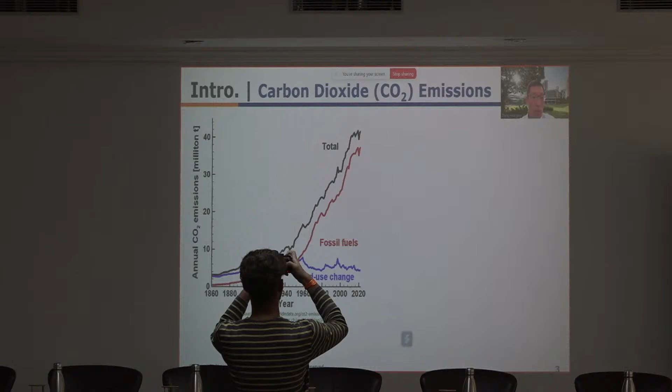Here you can see the increase of CO2 emissions since the last century. We can see that CO2 emissions mainly come from fossil fuel combustion. In terms of greenhouse gas emissions, CO2 accounts for around 65%. So basically, CO2 stands out as an important greenhouse gas, which drives global warming.

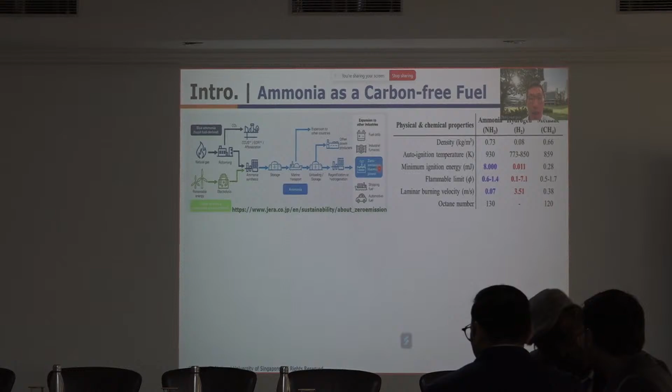Ammonia as a fuel is widely studied in recent years. Basically, we have blue ammonia if it is derived from fossil fuel. We can also have green ammonia, which is more promising if it is from renewable energy. For the downstream application, it can be used like fuel cell, industry furnace, and also power plants, and marine fuel, and for automotive fuel.

So it has some advantages. First of all, it is carbon free, so there is no greenhouse emission after it is burned. We also have the possibility to have the green or blue synthesis if it is from solar or electricity, and it also has a superior energy density. We can also leverage the existing infrastructure for a lower economic cost.

However, it also has some challenges. The first one is a very high minimal ignition energy, so it is very difficult to ignite and easy to quench. Here you can see we calculate the different fuels: ammonia, hydrogen, and methane. The minimum ignition energy for ammonia is around 8 millijoules. However, for hydrogen, it is much lower.

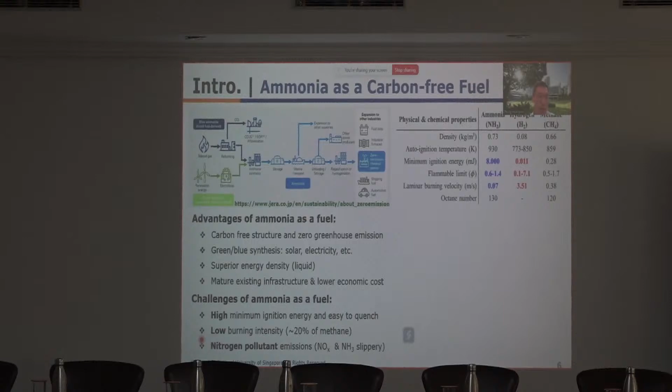The second point is a low burning intensity. Ammonia is around 0.07 meters per second, and for hydrogen it is 3.5 meters per second. The last one is about emissions. We have nitrogen pollutant emissions from ammonia combustion, so we need to develop a scrubbing system if you'd like to use ammonia in the engine.

There are different ways to enhance ammonia combustion. One of them is fuel blends. If we blend ammonia with hydrogen, it can significantly enhance the reactivity. Here we can look at the minimum ignition energy as a function of the equivalence ratio: this one is pure ammonia, then we have some hydrogen blend, this is 10% hydrogen blend increased to 70%, and this is pure hydrogen. We can see the minimum ignition energy is reduced significantly as long as we have hydrogen addition in the fuel mixture.

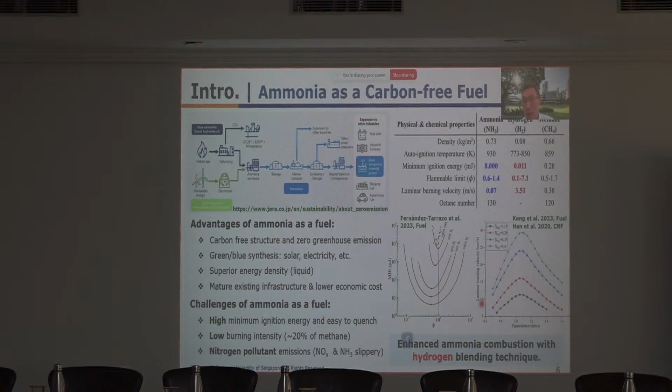Basically the same for the laminar burning velocity. We can see if we increase the hydrogen fraction, the laminar burning velocity increases very quickly.

For hydrogen and ammonia combustion, this table summarizes the different experimental results, focusing on speciation, ignition delay, and laminar burning velocity. You can see these are measured from different facilities, including shock tube, flow reactor, jet stirred reactor, and constant volume vessel. The conditions are also listed here, including temperature, pressure, equivalence ratio, and so on.

So what are the conditions for the internal combustion engine? This shows pressure versus temperature. For internal combustion engine, it is around here, corresponding to relatively high pressure and intermediate temperature. If we look at this data again, we find that relatively limited data corresponds to the engine conditions. The pressure I highlighted here is relatively high, but for the rest it is much lower than the engine conditions.

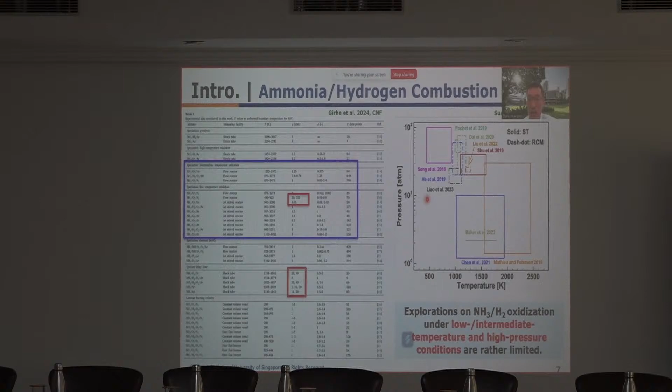This figure further visualizes the operating conditions in this test. So basically you can see that studies on ammonia hydrogen combustion at low, intermediate temperature and high pressure conditions are still very limited.

So we would like to say that this low temperature hydrogen-ammonia blend combustion at elevated pressure is caused by low temperature chemistry. When we say low temperature chemistry, it has been extensively studied for hydrocarbon fuels.

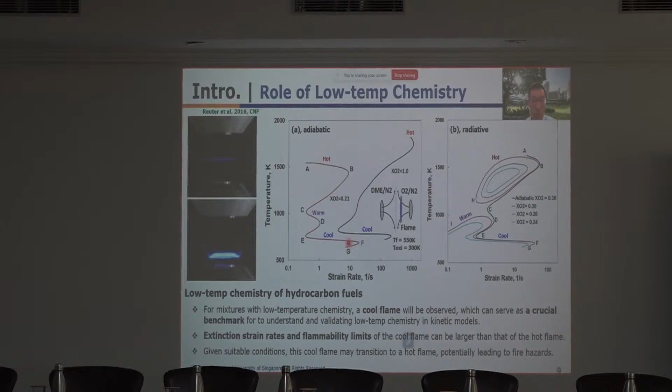This is temperature versus strain rate, under adiabatic conditions, and this radiation is considered. So basically we can observe the hot flame, the warm flame, and also the cool flame. The extinction strain rate and flammability limits of the cool flame can be larger than the hot flame—this is the extinction limit of the cool flame, and this is the extinction limit of the hot flame.

So basically you can see the cool flame extending the strain rate here. And given some suitable conditions, this cool flame may also affect the flame dynamics.

For the flammability limits, you can see here—when we change the O2 mole fraction, the flame curve becomes smaller and smaller. Once this curve degrades to one point, this hot flame becomes nonflammable. However, for the cool flame, we can still observe flame solutions. So basically, the cool flame may extend the flame limit.

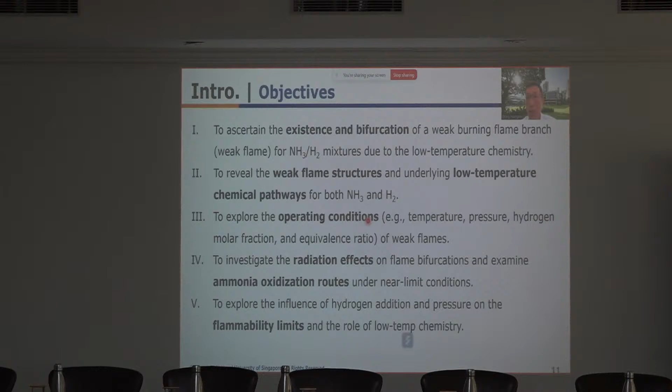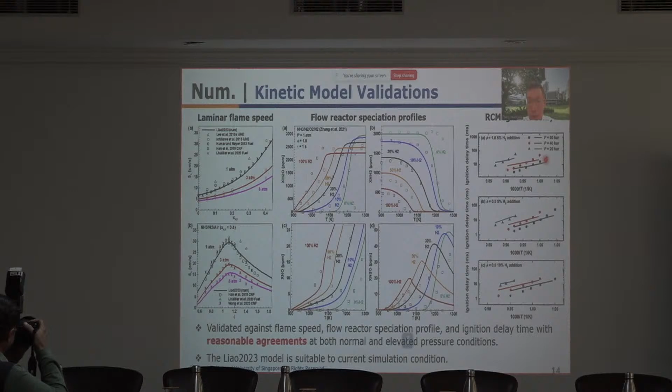So the last one is the RCM data, where we compare the ignition delay time for different pressures. So this mechanism is suitable for the current operating conditions in this work, in terms of the laminar burning velocity and also the speciation profiles.

So then in the results and discussion part, I will first show you the adiabatic hydrogen, ammonia hydrogen counterflow flame. This part of the work has been published in Combustion and Flame. So this is the results: this is the maximum temperature, and this is the strain rate. Here we show the flame solutions with different temperatures.

From 300 Kelvin to 700 Kelvin. So the equivalence ratio highlighted in yellow corresponds to the normal hot flame. This flame has a high temperature and also high heat release rate.

Okay, and so for all these cases, we can observe the cool flame, regardless of the choice of temperature. So we can compare the flame structure for the hot flame and cool flame.

So we choose the 500 Kelvin case, this black curve, and if we look at it, the weak flame corresponds to the dashed line, and the hot flame is the solid line. Basically, we can see the heat release rate of the weak flame is much lower than the hot flame.

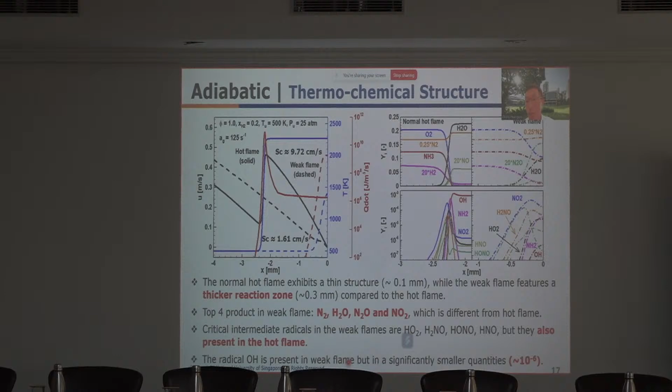They are also present in the hot flame, such as HO2, H2NO, HONO, HNO. And for the OH radical, it is present in the weak flame, but the quantity is very small, as you can see from here.

60, and the deactivated reactions are R0, R4, and R61. So as you can see from here, this is the heat release rate for the normal hot flame and also the weak flame.

So for the hot flame, reaction 160 contributes a lot to the heat release, and then the next one is 61. So 61 and 160 are ammonia reactions with the OH radical, and here it is amino radical reacting with OH, for heat absorption. These two are endothermic reactions.

So this corresponds to R0, where H reacts with O2 to give O and OH, and the other one is R4, where OH plus OH gives H2O and O.

So this is for the hot flame, and for the weak flame it is still reaction 160, where ammonia reacts with OH to give H2O and NH2.

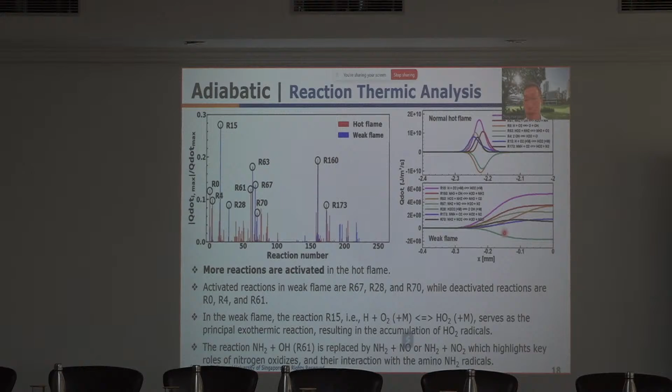So here we further look at the reaction paths. This red one is where we start from. For the hot flame, we can see ammonia and NH2, and then we have two paths, with different routes towards hydrogen and towards nitrogen. So NH, and NO directly to NH, and there are also some reactions involved in the weak flame generating N2O.

So here we calculated the reaction path, normalized by the reaction flux of this reaction. So we show that the circle means we have two stable branches, including the hot flame and non-hot flame.

In this case, we can further calculate the two extinction strain rates under the limited... if we further increase the hydrogen, the existing range of operating conditions of the weak flame, for different hydrogen mole fractions and equivalence ratios.

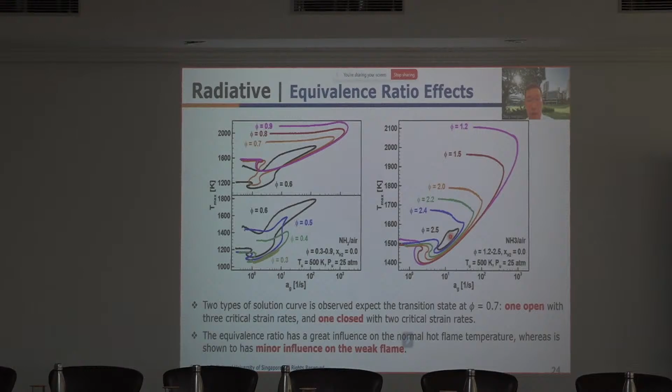This is for the lean case, and for the rich case we observe the same behavior. So if we increase phi to a relatively high value, say 2.5, the curve becomes closed. If we further increase it, we will reach the flammability limit position, and we also have the extinction limit, which indicates the jump limit for the weak flame between the lower and upper flammability limits.

So we are interested in the near... one interesting phenomenon I would like to highlight here is the case of phi equals 3.4. As you can see here, we will have two closed circles: this one corresponds to a hot flame, and this one corresponds to a weak flame.

So for this case, the strain rate actually to sustain the hot flame is already very limited, indicating it is very close to the flammability limit. However, for the weak flame, the strain rate is still much larger than this case. This means the existence of the weak flame can extend the flammability of the ammonia and hydrogen mixtures.

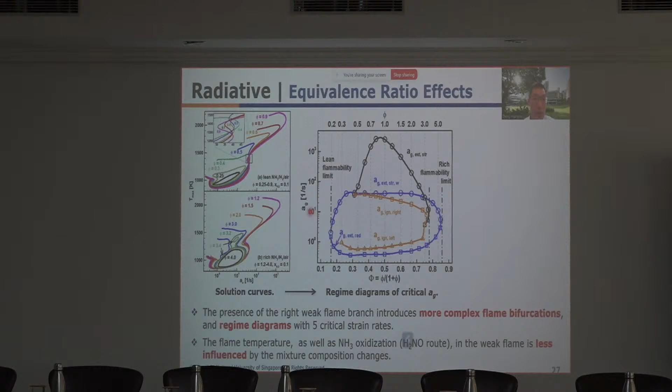We also show here the limit strain rates, including the AGEXT-STR, and also the blue curve. The blue curve is the AGSTR stretch for the weak flame, and the extinction limit, and this is another extinction limit for the right branch.

Here are the chemistry results. We did a similar analysis as shown in the previous slides, and the conclusions are similar. The H2NO is dominant, and then other important reactions include the N2HX reactions.

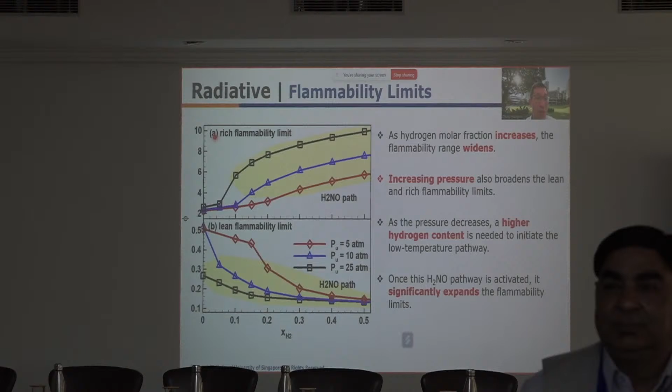This figure is relatively important for the second part of the work. This is the equivalence ratio, and this is the hydrogen mole fraction. We show the rich flammability limit in figure A and the lean flammability limit in figure B. Looking at the black curve, the region in between is the flammable range in terms of the equivalence ratio.

What we see is that when the hydrogen mole fraction increases, the flammability range widens. If we increase the pressure, such as from 5 atm to 10 atm to 25 atm, this increased pressure also broadens the lean and rich flammability limits. As the pressure decreases, higher hydrogen content is needed to initiate the low temperature chemistry.

We highlighted the range showing the importance of the low temperature chemistry, mainly H2NO path. You can see for both the rich side and the lean side, H2NO path is important in both situations. Once this H2NO path is activated, it significantly expands the flammability limit.

If we look at this black curve, starting from this point the H2NO path becomes important, and the range of flammable conditions is extended compared to this condition and this condition.

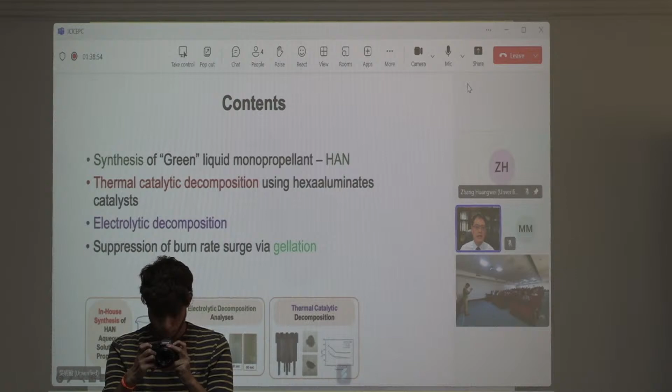For hexaaluminates, as I mentioned, it is a group of high-temperature catalysts, and we believe it is able to address the challenge of HAN's higher reaction temperature.

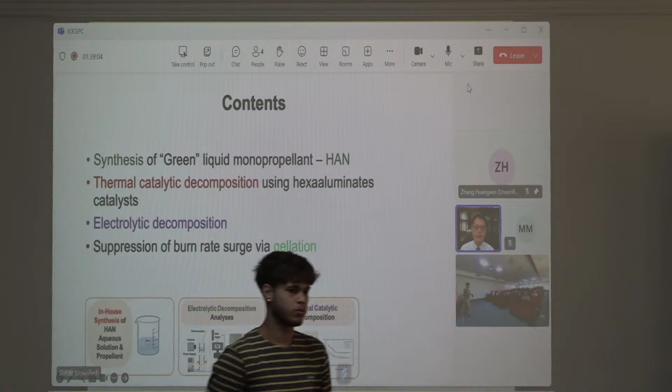The electrolytic method, on the other hand, simplifies things by removing the need for a catalyst bed in the thruster. Another challenge with HAN-based propellant is the burn rate spike caused by water boiling within the propellant.

We have tackled this by gelling the propellant with fumed silica. Building on this, we are now developing propulsion systems. There's some ongoing work there. So this is basically what I would like to discuss today in this talk.

First, as we consider the rise of space exploration in the past 10-20 years, apparently space propulsion has a growing role in scientific and commercial applications.

The need for sustainable, safer propellant has become even more apparent. Traditionally, space missions have relied heavily on chemical propellants such as hydrazine, which is known for its high performance and reliability.

However, hydrazine also has significant drawbacks, such as high toxicity and volatility, which make it dangerous to handle and store.

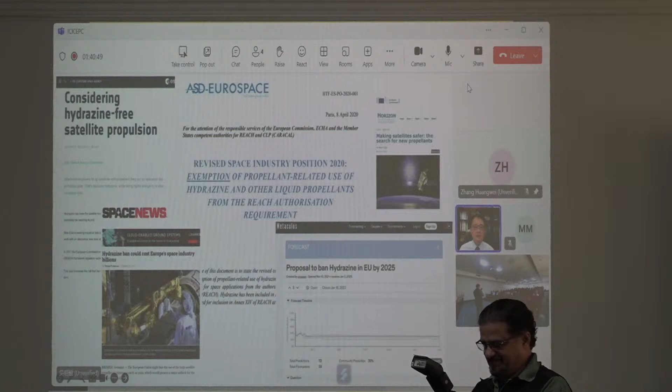Since the early 2000s, there have been discussions about banning hydrazine due to its toxicity and environmental impact, in order to mitigate the risk of handling exposure.

But as you may know, hydrazine remains widely used in space propulsion today because no alternative has fully matched its reliability and performance.

Potential substitutes, including hydrogen peroxide, ammonium dinitramide, and hydroxylammonium nitrate, show promise but require further development.

More research is essential to advance this new generation of propellants, to find safer, effective replacements for hydrazine that meet the demands of the space industry today.

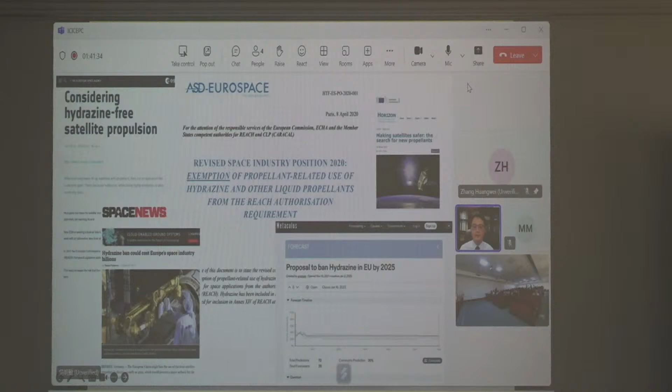Green propellants are designed to offer reduced toxicity and a safer handling profile while maintaining comparable propulsion performance.

Material toxicity is often measured by what we call LD50, which refers to the amount of substance that, when administered to a mouse, causes a 50% fatality rate.

Even skin contact with hydrazine can be deadly, with an LD50 of just 91 milligrams per kilogram.

In comparison, green propellants like HAN-based SHP163 and AFM315E have overall LD50 values above 500 milligrams per kilogram. And the other type of green propellant, hydrogen peroxide, has an even higher LD50.

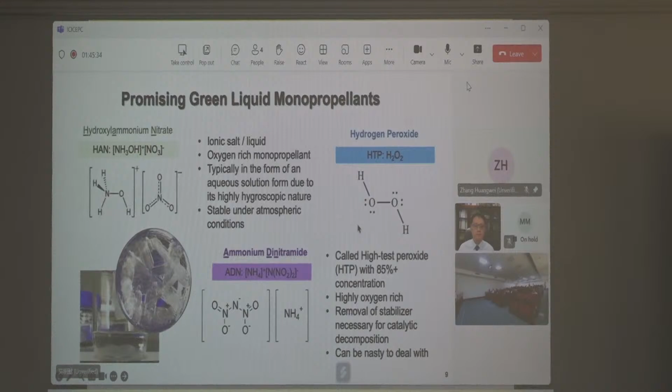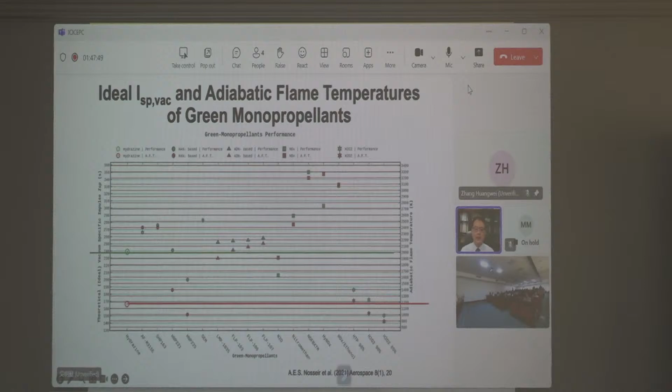For example, HAN's specific impulse can reach around 257 seconds in vacuum, which is competitive with hydrazine. However, what really sets HAN apart is its density, around 1.83 grams per cubic centimeter, significantly higher than hydrazine. This higher density allows more propellant to be stored in a limited space, which is especially valuable in compact systems.

The advantages and superior performance of HAN-based monopropellants have been proven in orbit through two demonstration missions: NASA's Green Propellant Infusion Mission, or GPIM, and Japan's Green Propellant Reaction Control System on the RAPIS-1 satellite. The GPIM test showcased HAN's potential with a 50% improvement in fuel efficiency compared to hydrazine. Together, these missions highlight not only HAN's performance benefits, but also its reliability and suitability for long-duration space missions.

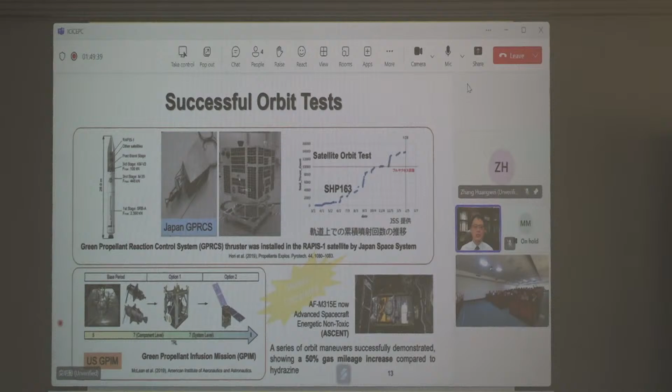With the encouraging results of HAN-based propellants, there are also discussions on using HAN for a lunar mission to propel a 6U satellite that will investigate the moon's poles for water ice.

Another exciting application of HAN-based propellants involves multi-mode propulsion, where a single propellant can serve different roles in the same mission. There are different approaches to this multi-mode concept. One approach is to combine a chemical thruster and an electric thruster, like a liquid pulse plasma thruster, in a propulsion system while sharing the same propellant.

Another design involves using a HAN-based system operating in chemical mode for high delta-V maneuvers and switching to an electric mode, such as pulse plasma, for low thrust and high ISP operations. The way to do it is by switching the power supply between DC and pulse power. This flexibility enhances the system's versatility for complex missions.

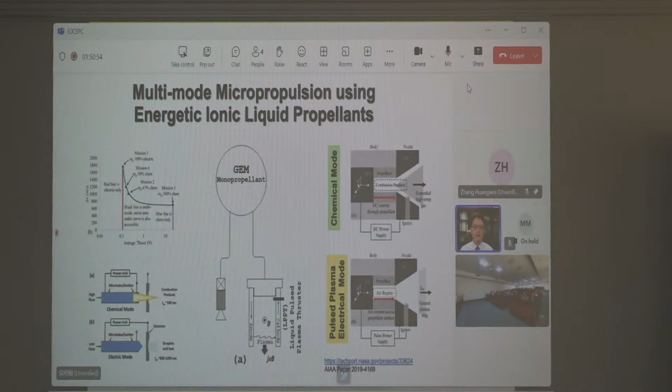Given promising results in the literature and some inspiring new concepts, we were motivated to spend the past few years developing technologies to tackle the challenges associated with HAN, especially in terms of synthesis, decomposition, and combustion.

Now, let's start with HAN synthesis. Producing propellant-grade HAN solution is essential, and although low concentration HAN is commercially available in some countries, it requires further purification to remove the stabilizers and increase its concentration for propellant use. But unfortunately, we don't have access to commercial HAN solution here in Taiwan, so we had to start from scratch.

In our lab, we have developed a titration process to produce high concentration HAN solutions up to 95%. The process begins with titrating nitric acid into hydroxylamine at low temperatures to form HAN. Maintaining the temperature is critical, since side reactions occur instead of forming HAN if the temperature is too high.

After getting the low concentration HAN solutions, we concentrate the resulting solution using a rotary evaporator. To ensure quality of our HAN products, we conduct FTIR and other analyses, which confirm the success of our approach.

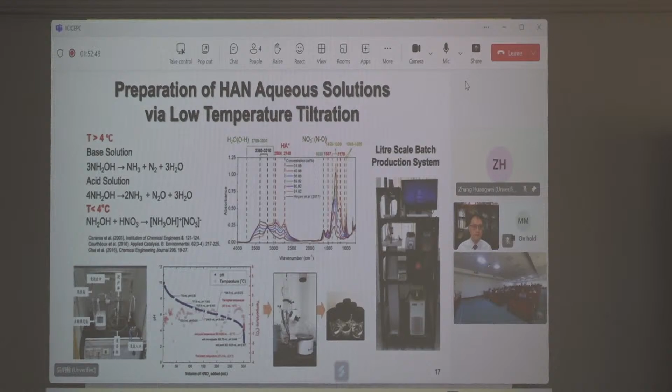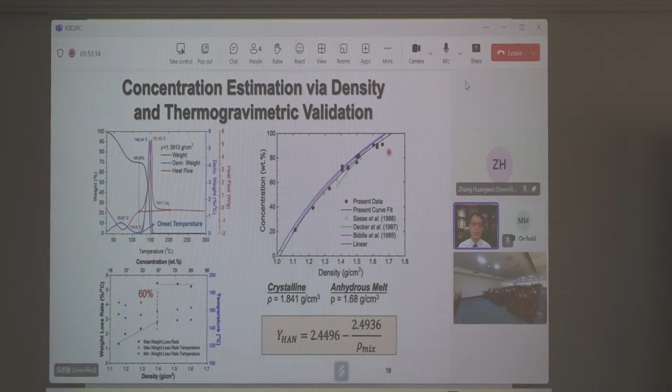We also assess the water content of our HAN solution using thermal gravimetry. Additionally, by taking this data and also employing a density meter, we establish a correlation between concentration and density. Our results align closely with values reported in the literature, further verifying the success of our approach.

So, building on our foundational work in producing high purity HAN solutions, our first challenge was to identify a suitable high temperature catalyst that can be used for further propulsion systems.

This catalyst, as we mentioned, needs to be effective at decomposing HAN while withstanding the high temperature environment, which is atypical for traditional hydrazine catalysts.

Thermocatalytic decomposition is actually the typical initial method for liquid monopropellant in space thrusters. In this process, the catalyst is preheated to a temperature that allows for rapid conversion of liquid monopropellant into gas-phase intermediate products as it flows through the catalyst bed. This decomposition product then combusts further in the downstream thrust chamber, then through the nozzle to produce thrust.

While platinum and iridium-based catalysts commonly used for hydrazine are also effective for HAN, the durability of these noble metal catalysts is a concern due to the significantly higher flame temperature of HAN, as well as the acidity of the propellant. As a result, investigation into new high-temperature catalysts is necessary to ensure reliable performance of HAN-based propulsion systems.

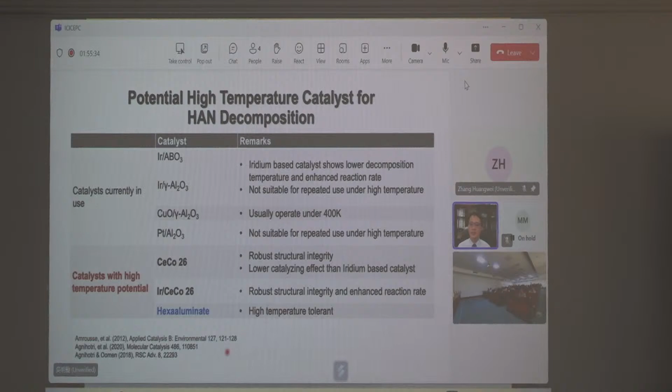A little background on hexaaluminates: they are a type of aluminate compound with a unique layered structure. They have alternating layers of highly packed oxide ions and mirror planes. Their general formula is...

ABXAl12-XO19. In this formula, A is a cation in the mirror plane, and B is typically a transition or noble metal that can replace aluminum in the structure. By adding different metals, we can adjust the properties of hexaaluminates to suit our needs.

These materials are incredibly stable, even at temperatures over 1600 degrees Celsius, and they resist thermal shock and sintering.

Thanks to our collaborators at ITRI in Taiwan and Kongju University in Korea, we have tested several types of hexaaluminates, labeled IT0 to IT6 and KN0 to KN1, to see how well they work for decomposition.

Decomposition performance tests were conducted using a high-pressure batch reactor. For each test, 1 milliliter of propellant along with 0.3 grams of catalyst were placed in the reactor's crucible. The sample was heated by a heating block at the bottom of the reactor at a rate of 10 degrees Celsius per minute. Temperature in both the liquid and gas phases, along with vessel pressure, were recorded throughout the process.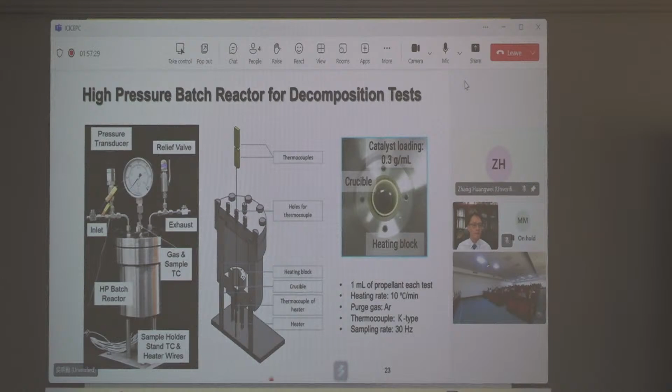From the pressure and temperature data, we can derive several performance indicators by calculating the change in temperature and pressure. These indicators include decomposition onset temperature, reaction rate, pressure rise or gas generation rate, and burn rate.

Our test shows that all hexaaluminate catalysts are effective at lowering the decomposition temperature. Notably, the IT6 catalyst, a commercial gamma alumina pellet coated with hexaaluminates, can achieve a reduction of the decomposition temperature by over 100 degrees Celsius. High concentration of platinum impregnation improves consistency in catalytic performance, although this approach comes with substantial costs. So in the later tests, we will focus on this IT series catalyst.

The results also highlight the promising performance of hexaaluminate catalysts on the HAN-based propellant blend SHP-163, which uses methanol as the fuel. These hexaaluminates can achieve a reduction in decomposition temperature by about 60 degrees Celsius.

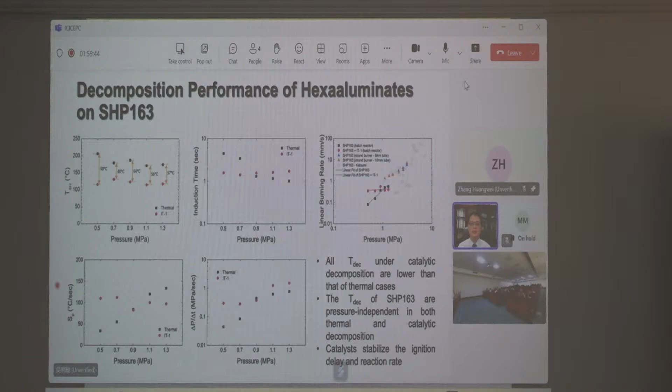Under catalytic decomposition, the induction time, reaction rate, and linear burn rates and gas generation rates all show much less pressure dependency compared to pure thermal decomposition, which are the red symbols in this chart. These findings demonstrate the strong potential of hexaaluminate catalysts for improving the decomposition process of Han-based propellants.

Due to these fundamental research results, we built a 100 millinewton prototype to test the performance of these hexaaluminate catalysts on a prototype thruster system.

We have a relief valve on the system, so this is actually due to the pressure rising higher than the pressure that we set on the relief valve in the current setup.

To address this and to make a more comprehensive study, we are working on an improved test rig which will use a blow-down propellant feed system. This is our work in progress.

This concludes what we have been doing on the catalytic decomposition for HAN-based propellants. In the next section, I will discuss the electrolytic decomposition of Han.

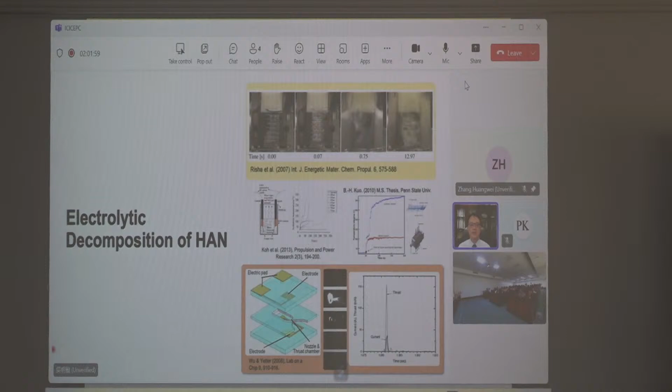To gain insights into this mechanism, we designed experiments specifically aimed at exploring this aspect. We perform electrolytic decomposition tests in the high pressure chamber with side windows, so that the process can be observed and recorded using a high-speed camera.

Care has been taken to avoid any voltage hysteresis during the test, as this could affect our measurements. Typically, there is about a 50 millisecond rise time for the voltage to reach the set point when most power supplies are switched on, and this can introduce some uncertainty in the electrolysis measurement.

So what we have been doing is loading the power supply with a resistor and then switching the current flow from the resistor to the ionic liquid at the start of the test. As you can see here, this allows us to maintain a constant voltage right from the beginning, avoiding the voltage hysteresis which may contaminate our measurement.

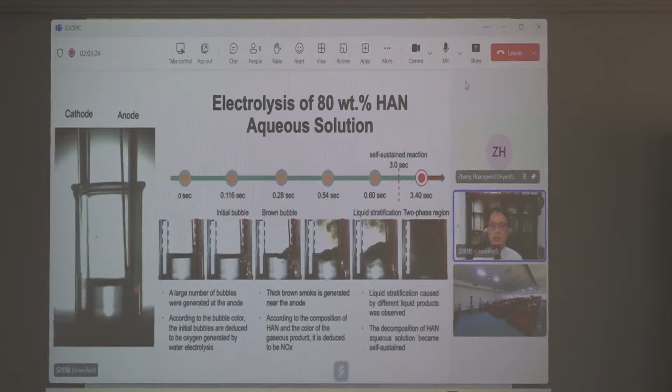What I'm going to show you here is the electrolysis procedure on a HAN aqueous solution. In this high-speed video, we can observe the electrolytic decomposition process of this solution. The cathode is positioned on the left, while the anode is on the right.

If we break down the video, almost right from the beginning we can see a large number of bubbles forming on the anode side. Initially these bubbles are transparent, suggesting that they are likely oxygen from water electrolysis. Shortly after that, thick brown smoke appears near the anode.

This indicates the generation of nitrogen oxide. At about 0.6 seconds into the process, we start to see stratification in the liquid phase, possibly due to the formation of different liquid products.

Interestingly, the decomposition reaction becomes self-sustaining, continuing even after we turn off the voltage. For this test, we turned off the voltage at 3 seconds after the start of the experiment, but we observed continuous reaction after that.

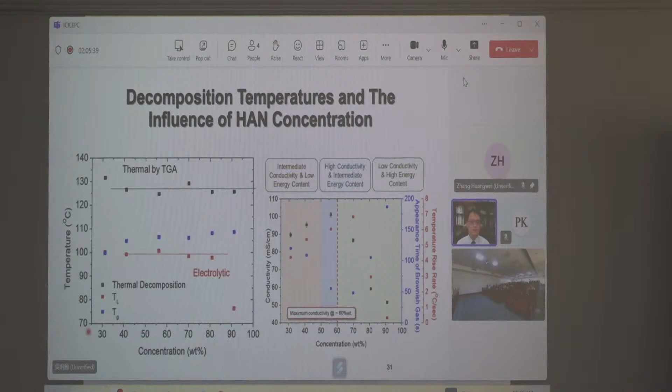We also observe a go and no-go threshold for electrolytic decomposition, with an electrolysis duration between 0.5 and 0.75 seconds. If we apply the voltage for 0.5 seconds, there will be a no-go. If we slightly increase the electrolysis duration up to 0.75 seconds, then it's going to be a go scenario.

Despite only a small difference in deposited energy between these cases, this suggests that an electrochemical reaction pathway may be activated within the ionic liquid with this slightly longer electrolysis duration case.

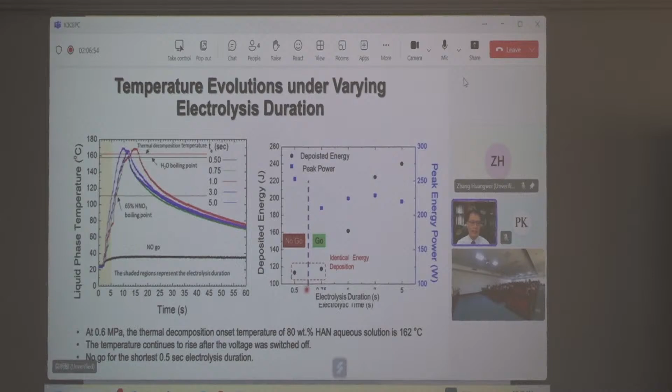We further examined the initial current behavior in the process and compared it with high-speed video observations. We found that the initial rise in current coincides with bubble formation on the anode as ions migrate toward the electrode. As ion concentration near the electrode reached saturation, the current peaked and then began to decrease. We observed short drops and fluctuations in current due to intense bubbling, which intermittently blocked the flow.

In the case of a 5-second electrolysis, the current has already dropped to a very low level, even before the voltage was switched off.

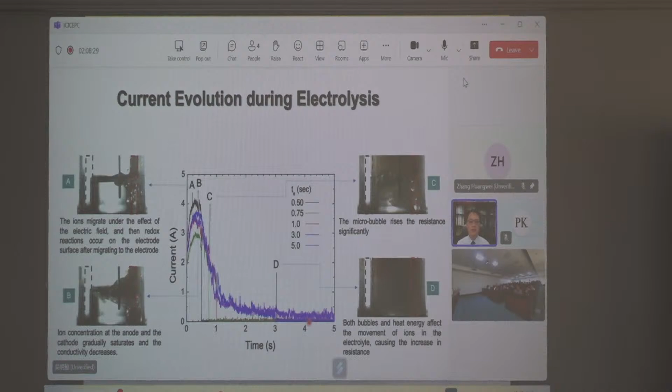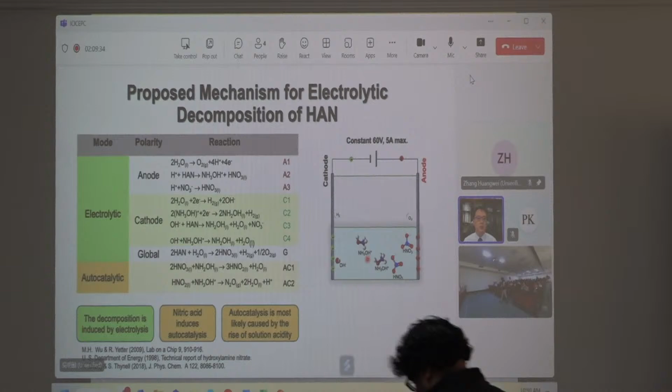This results in high concentrations of nitric acid near the anode, and hydroxylamine near the cathode. This nitric acid is known to have an autocatalytic effect on HAN decomposition, explaining the intense brownish smoke observed around the anode. With this smoke, we have validated that the electrolytic decomposition of HAN is indeed initiated by an electrochemical process.

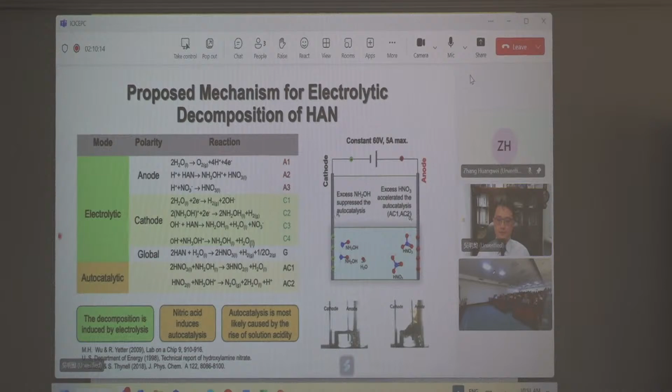The reason for this pressure surge is the difference between water's boiling point and the decomposition temperature of HAN. At lower pressure, the boiling point of water is below the decomposition temperature of HAN. Water boiling temperature at atmospheric pressure is around 100 degrees Celsius, while the decomposition temperature of HAN is around 160 to 190 degrees Celsius. This means the heat released from HAN decomposition is absorbed by the water's latent heat, resulting in a slower reaction.

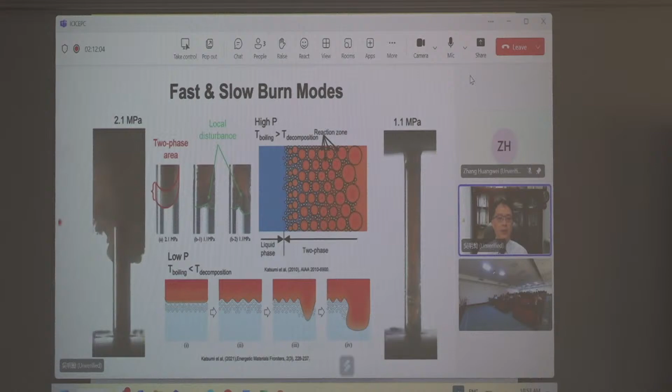But as pressure increases, the boiling temperature of water rises. Once it exceeds the decomposition temperature, it decomposes directly into gas product. This significantly accelerates the reaction rate, as you can see in the movie on the left of this slide.

So to mitigate this, we came up with an idea of gelling the HAN using fumed silica, and then we performed strand burner tests. In this video, we will actually play it in sync.

You can see that on the leftmost test is the strand burner test performed under atmospheric pressure, and on the rightmost video, it is under 5.1 MPa, 50 bar.

As pressure rises, the reaction propagation rate is still increased. Interestingly, on the leftmost video, the reaction under atmospheric pressure shows a very slow propagation of this reaction. It is actually so slow that I need to call it because it may take around 1 minute to get the video to finish.

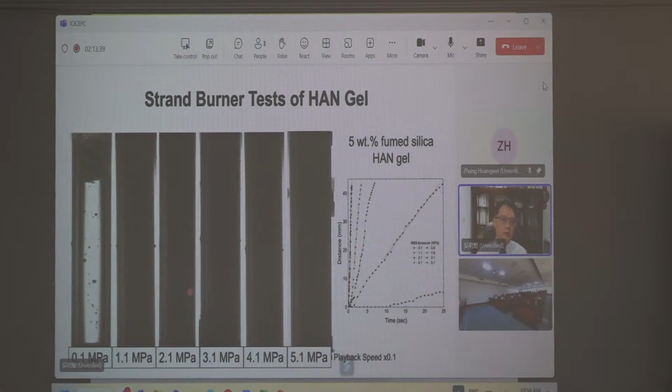For your information, all these tests are under argon gas conditions, so there is no gas-phase reaction between the environment gas and propellant.

So we put together all these data points, and the first thing we found is that this pressure surge for the liquid form HAN has been mitigated. Look at these solid triangles - these are the points when we gel these HAN solutions.

We find that self-sustained propagation can be extended down to atmospheric pressure by gelling the HAN solution, while the reaction is not self-sustainable below 0.5 MPa in liquid form. We are actually still working on reviewing the mechanism behind these findings - why we are able to mitigate the reaction rate surge and also extend the self-propagating limit of HAN solutions by gelling it.

Preliminary analysis shows that thermal transport enhanced by fumed silica particles may be the driver for this phenomenon. With their small specific heat and size, fumed silica particles can easily be heated up and then convected to the unreacted liquid HAN, resulting in better thermal feedback between the reaction zone and unburned region. The local hotspots generated by this high temperature fumed silica make decomposition of HAN easier at these sites, which mitigates the pressure surge and extends the self-sustainable limits.

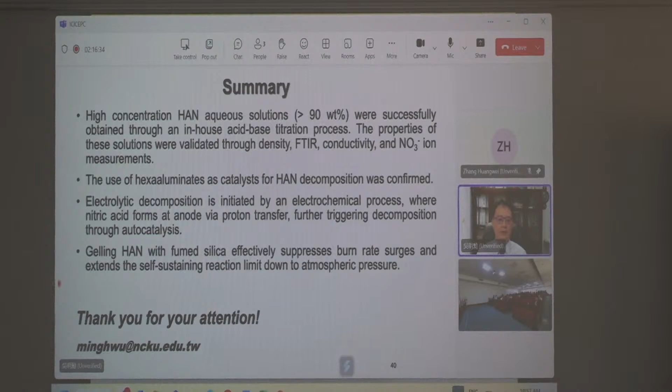Thank you, Professor. So do we have any questions from the participants? Hello, can you hear me? Professor, I think we don't have any questions from the participants right now. Am I audible, Professor? I'm sorry, the connection is not great, I cannot hear you clearly. Am I audible, Professor? Mic is on. Professor, can you hear us? Professor, are we audible to you? Or you can just type your questions using the meeting chat, and I can answer - I guess that could be easier. Sir, am I audible to you right now?

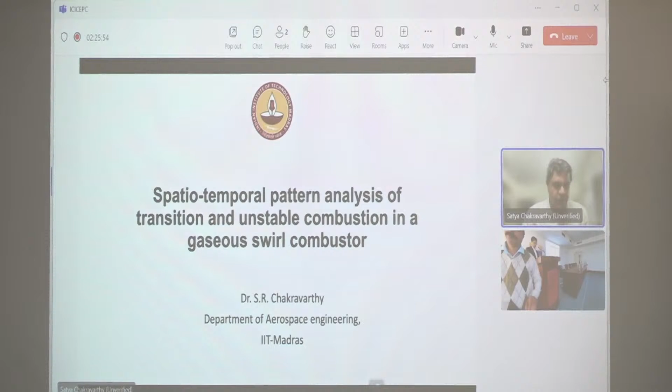This is coming out of recent work that we have been doing on our research in combustion instability. This is done by one of my latest PhD students, Vikram Ramanan. I'm actually pleased to present this particular work, it's part of the PhD work. The title is Spatiotemporal Pattern Analysis of Transition and Unstable Combustion in a Gaseous Swirl Combustor.

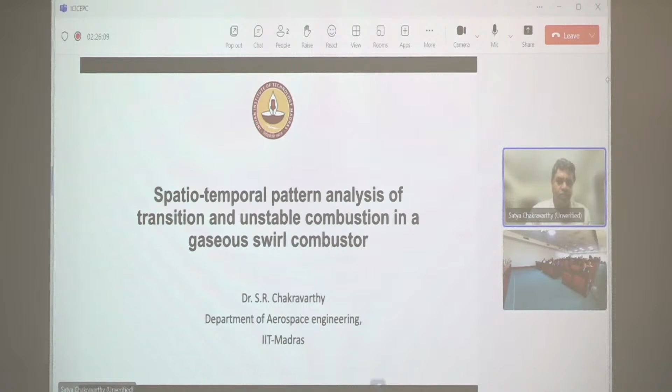The whole motivation here is that combustion dynamics is actually a complex process involving flame, flow and acoustic variables. The acoustics is dominated by the flame and modulates the flow as well as the flame in turn, which leads to instability. Considering this complexity, each of these processes is complex by itself and their interaction is even more complex. Several approaches have been taken to tackle various aspects of combustion instability. Combustion dynamics actually relates to generation and presence of good order in the context of turbulent combustors. As the acoustics resonates with the combustor, everything becomes more orderly compared to what would otherwise be completely turbulent. The advent of non-intrusive diagnostics and application of data analysis serves as a common thread for how combustion instability can be tackled.

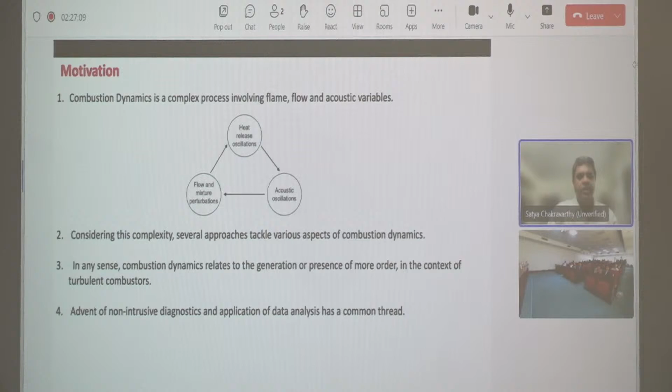The way we will go through this presentation is we will first describe the experiments and the expected unstable characteristics. We will go through combustor characterization through a multitude of states: frequency domain, time domain, and a joint approach. Then we will branch off looking at how stable combustion is looked at versus unstable combustion in terms of dynamical states. The stable combustion actually has anomalies during this condition, in the pressure values as well as how well to mark them. In the fixed point dynamical states, we will see frequency locking between flame emission and pressure, forming the basis for a simple probabilistic model.

Ultimately, the pressure and emission actually hold the key to the unstable combustion. We will look at flame patterns in the unstable condition and perform the Hilbert transform. With this, we can see that the flame curves and then there is a rotation. The flame skews correspondingly with the pressure. And with this, we will actually be building time-resolved images from sparsely sampled data.

The combustor that we are looking at is actually a swirl combustor. We have a settling chamber through which the air enters and gets into the combustor. The combustor has a total length of about 1.2 meters. There is an inlet section and a unit of optical access module where the fuel injection happens, so that we will be able to pre-mix the mixture. As we enter the combustor, there is a swirler that induces the swirl, while the test section has optical access for us to image the flame in a hands-free manner, using a group of PMTs, photomultiplier tubes, as well as a high-speed camera. Then we get into the extension ducts, which provide the natural frequency required for the particular combustor to interact with the flame and the swirl. We have pressure transducers across different locations of the duct so that we can measure the acoustic mode that it actually takes.

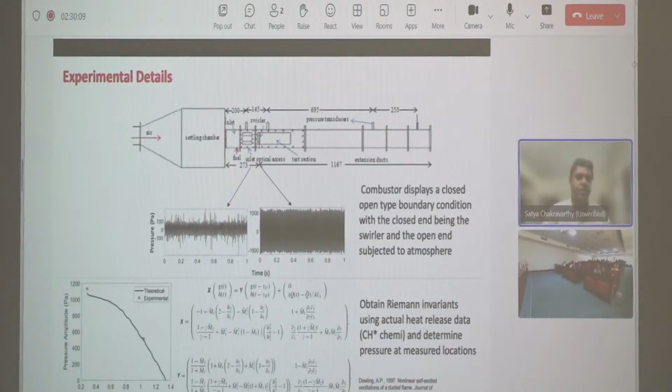From this, we can measure pressure, as I said, at the combustor and under the section, and see different kinds of patterns. The stable combustion is something which has fairly low amplitude, under plus or minus 100 Pascals, but you can see stray excursions with spikes outside of this plus or minus 100 Pascal range. Whereas when you get into an unstable combustion regime, the pressure actually gets more or less uniformly to plus or minus 1000 Pascals. So we want to basically first of all understand whether there is an acoustic mode in operation or not.

For that reason, we actually use the pressure data obtained at 4 points. You can see one at the inlet optical access module, one at the test section, one in the middle of the extension ducts, and one at the exit. With these experimental data, we are in a position to actually solve the equations of acoustics and compare the acoustic data and the theoretical expression to find out what is the full acoustic mode everywhere.

In the combustor based on the data that's actually sampled only in certain locations. This is a fairly standard approach based on which we are able to see that the combustor is actually exhibiting a closed-open condition. It's a pressure maximum at the swirler and a pressure minimum at the exit. So it's kind of like whatever you do, that's the kind of acoustics that must exist.

How we characterize the combustor is to measure the pressure and the integrated flame CH star chemiluminescence using the photomultiplier tube. We then do multiple analysis, or we actually do the encoding; the time series of the measured quantities provides a direct method to understand subtle variations in the time series versus the control parameters. This is a very straightforward approach.

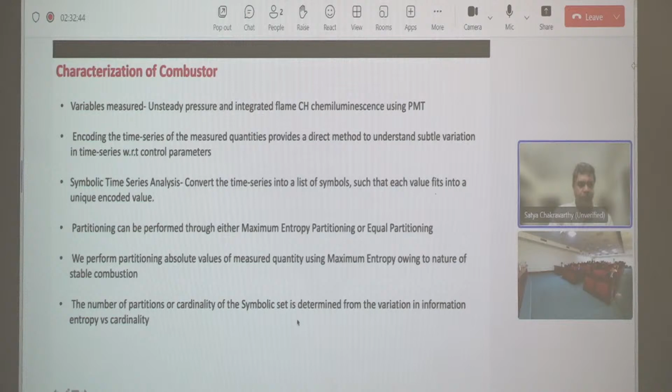We perform partitioning of absolute values of measured quantities using maximum entropy, owing to the nature of stable combustion. The number of partitions, the cardinality of the symbolic set, is determined from the variation in information entropy versus cardinality. So here, for example, is the pressure on the left-hand side, with 3 states: one is the stable combustion, one is the intermittent combustion, and the third one is unstable combustion.

Throughout the rest of the talk, we will see that we are actually looking at these 2 states, as we discuss the approach to the layout of the presentation in the second slide. On the right-hand side, we actually see data in chemiluminescence instead of the pressure data. We're essentially looking at, on one hand, the pressure data, and the chemiluminescence data from the flame.

Based on that, if you now look at those partitions, we will find that the amplitudes are actually skewed towards one particular state. That is indicating that we are actually approaching a combustion instability. From what was originally equal everywhere, you now begin to see the bias that is building up for one particular state.

What we're essentially doing is we are now setting these thresholds on these amplitudes. Each of the thresholds is called alpha, beta, gamma, delta, epsilon, and so on. We count the number of states in each of these, alpha, beta, gamma, and so on, and we take them to be equal for the stable case.

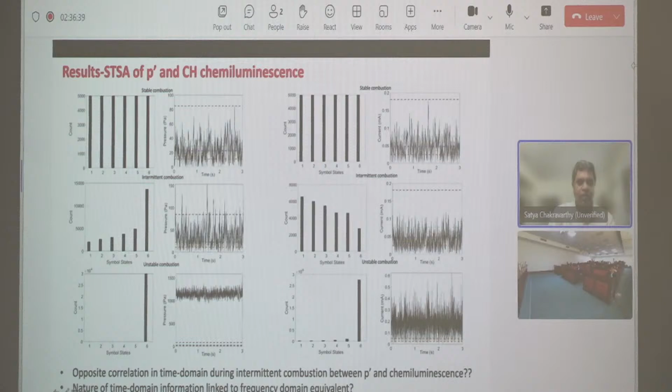So very similarly, if you are able to do something like a wavelet transform, we find that we can do a pressure analysis in the frequency domain, and we can see that in the case of stable combustion, you have a very sporadic set of peaks in the frequency domain. In fact, previous work pointed out the opposite trend of chemiluminescence and pressure during the intermittent combustion. The nature of the time domain information is linked to the frequency domain, so let's look at the frequency domain, which is the motivation from the previous slide.

So if you now look at the frequency domain, the pressure oscillations have peaks that are seen in frequency during the stable state, spread out across the frequency range. Now if you look at the intermittent state, it's peaking at a fairly low level. The amplitudes are still around 250 pascals here, and the peak frequency amplitude is still at about 50 pascals, which is still higher than the stable combustion state. But the more interesting thing we can understand easily is the unstable state. When combustion instability happens, everything, all the energy, is packed at about the 150 Hertz mark, and there's hardly anything elsewhere. So this gives you a very good sense of how this relationship exists.

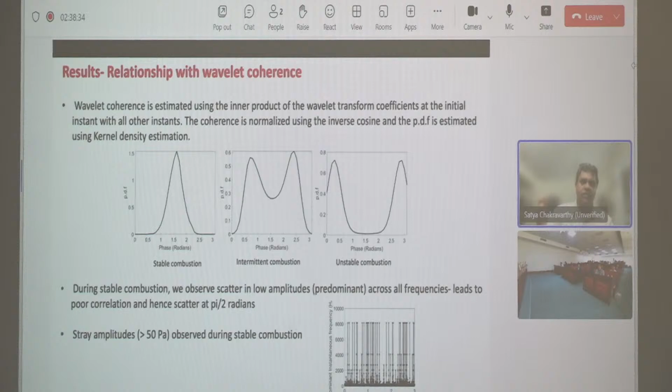So if you look at the wavelet coherence, we find that all frequencies exist, and there's a bit of scatter that gives rise to the peak at the stable combustion, which then splits into two for the intermittent state, and it gets even more starkly varying when you now have an unstable state. So this again gives you a trend on how a central peak splits into two, and if you see it splitting into two, it means it is going into an unstable state. So the bigger picture is that we have these kinds of tools that we are developing, previously the STSA and now the wavelet coherence, where we can see how this trend towards instability happens, so that we will be able to determine precursors to instability.

So is there a way by which we can determine some kind of probabilistic model of phase synchronization that will help us explain how the intermittency can be used as a precursor to instability? The inherent flame oscillations have a distribution of inherent frequencies. So the input flame oscillations consist of a distribution of inherent frequencies, and the intensity fluctuations are affected by the nearest upstream layers, and this is essentially the basis of what we call causality.

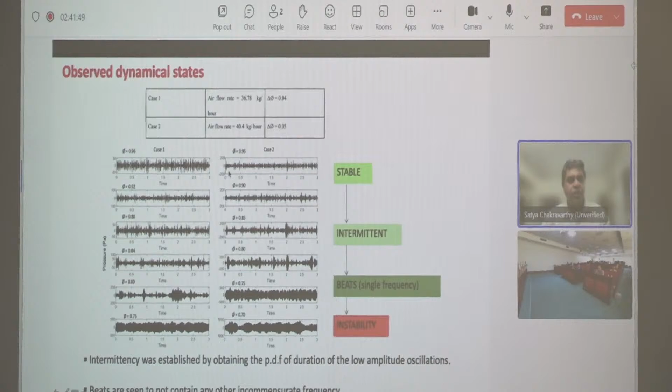Now in both these cases, we actually see how the transition to extinction happens. Keep in mind the axis values. We are starting with, in the lower outflow rate case, case 1, the stable state having minus 3 pascals as the pressure oscillation. We are plotting the same thing with points that are camouflaging the actual amplitude for the most part, but we have plotted at minus 200 to plus 200.

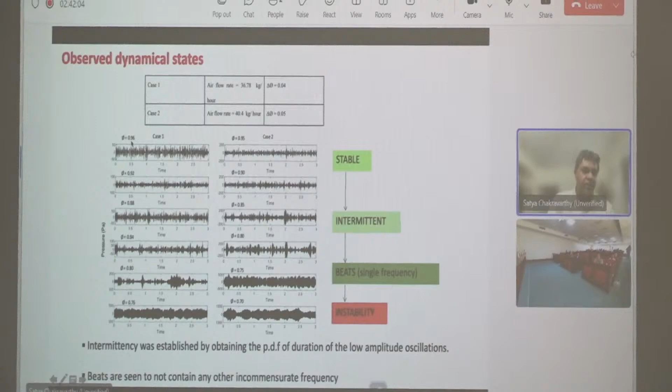Full-blown instability again is not exactly constant amplitude. It does have moments of silence as well as lower amplitudes and so on. The beats are seen to not contain any other incommensurate frequencies. The frequencies are clearly shifting towards the natural acoustic mode.

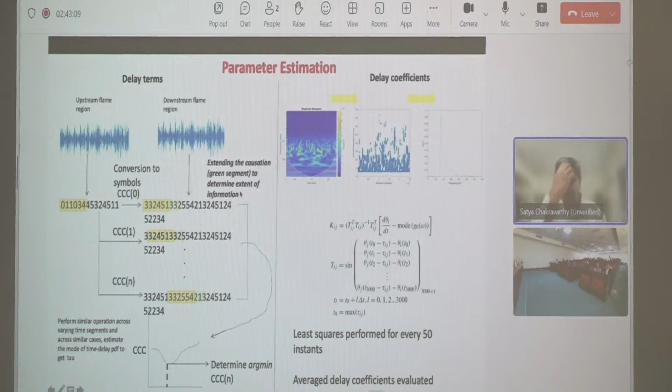So how do we actually evaluate these patterns? A little bit of an involved slide. We have to look at what's called the delay terms, the delay coefficients. In the interest of time and clarity, let's skip this and look at the actual results at some point.

So how the acoustics couple to the combustion is essentially based on the wave equation. This is a nonlinear equation that we are looking at, and we look at an R parameter which is equivalent to the Rayleigh index, where we look at P and Q prime divided by the max of Q. So it's a normalized Rayleigh index, if you will.

At every iteration, the flame oscillator has a fluctuated acoustic frequency, but with better driving and lower phase difference. However, the flow actually tends to match only when you get into the instability case. Until then, you have multiple frequencies of the flame, the flow, and the acoustics. The flame oscillator has an incentive to fluctuate at the acoustic frequency because of the acoustic feedback. That's a coupling between the acoustics and combustion that prevails weakly in the stable conditions, progressively stronger when you get into intermittent states, and more intense when you get into unstable conditions.

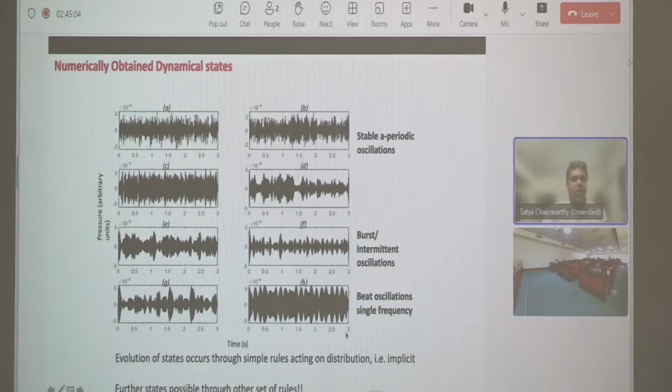So if you're able to numerically obtain the oscillations based on this nonlinear equation, we can mimic the way stable oscillations are. You will clearly see, because of the nonlinearity, there are occasional spikes happening even under stable conditions, but you have intermittent oscillations next, and then we get into burst oscillations, which are even more intermittent, and finally we get into this beat oscillation for the single frequency, leading to full-blown instability.

So if you look at the amplitude, it matches with the experimental data. We can clearly see that even under stable states, this is very important, because we are able to come up with a model that explains how even stable conditions can be modeled, and progressively intermittent conditions can be modeled, and how we can get all the way to the unstable condition.

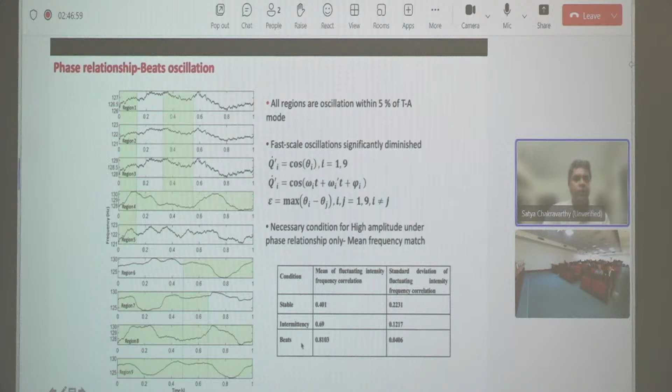We are able to identify which region is creating further instabilities.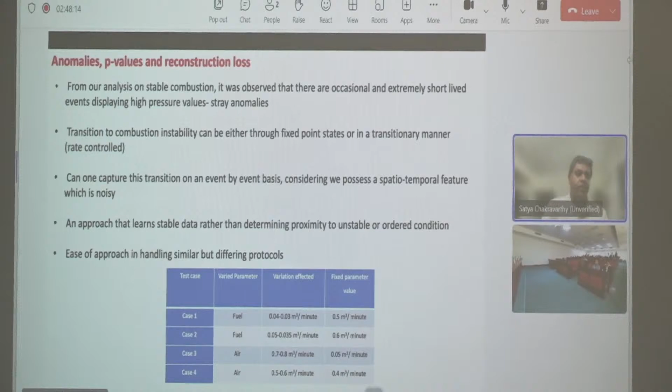So an approach that learns stable data rather than determining the proximity of the unstable condition. It's important for us to take that, because in combustion, the engine is actually stable, and we have to know when we will become unstable. We have to be able to know this even looking at the stable data, rather than letting the instability happen. That's what we are actually trying to do with this.

So we have three very different parts. Here the fuel is actually varied, keeping the air constant, and there are two such variations with different air values. The other one is air is varied with the fuel constant, and we do this at two different variations for two fixed values of fuel.

So we then have the transition unsteady pressure. You can clearly see that there is a lower amplitude in the beginning for case 1, and case 2 is actually...

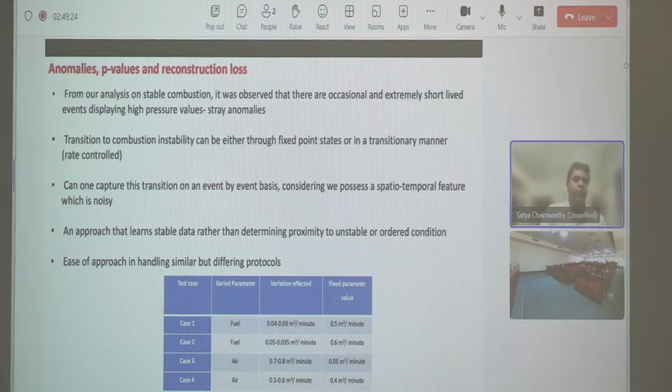...a higher air flow rate value, and then we are varying the fuel flow rate within approximately the same range. So the higher air flow rate value in case 2 relates to slightly higher stable state amplitudes, and then a transition to approximately the same amplitudes of instability as in case 1.

In case 3, we don't really have too much of a transition, but in case 4, we actually see this transition.

So we can then identify the pressure signals for pre-transition and post-transition. We can clearly see there are multiple frequencies available in the pre-transition, and they convert into more or less a single frequency. We can't say again it's a noisy turbulent regime, we have the beats as well. So multiple smaller frequencies result in a more organized pattern, relatively speaking, in the post-transition regime.

This is captured better in a wavelet transform, time-frequency, to plot the amplitudes. We can clearly see as time progresses, over a course of 6 seconds, very intense frequency tubes actually coming up at the natural frequency of the acoustic.

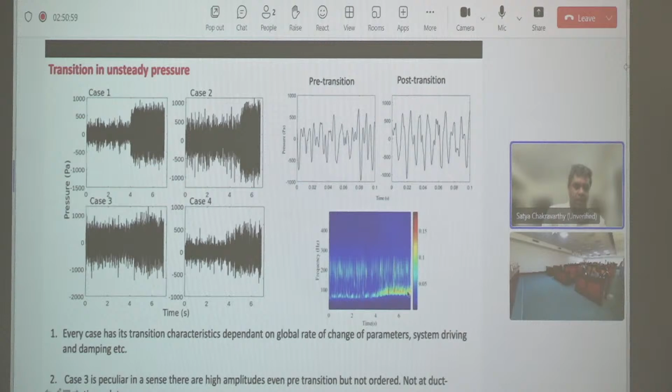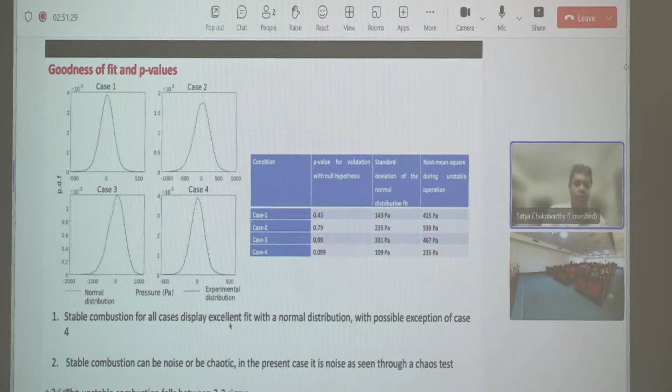So how do we actually correlate these in order to get the pressure and the temperature to correlate? What we find is that in all the cases there is an excellent fit between the pressure and what we call the normal distribution and the experimental distribution. Therefore, it's good for us to be able to understand what happens within the stable state.

So, is it possible for us to add features to this by doing an image processing analysis and try to look at features that will correlate to the anomalies in the first place, which can then lead to intermittency and then instability?

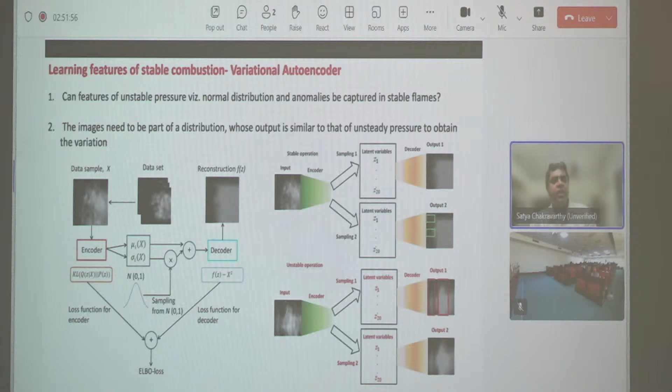We'll skip that, in the interest of time, and get to the unstable combustion flame patterns, where we perform a Hilbert transform on the flame images, and then collect pixels that are within about 3 degrees to obtain the brightest regions and label them as coherent image phase.

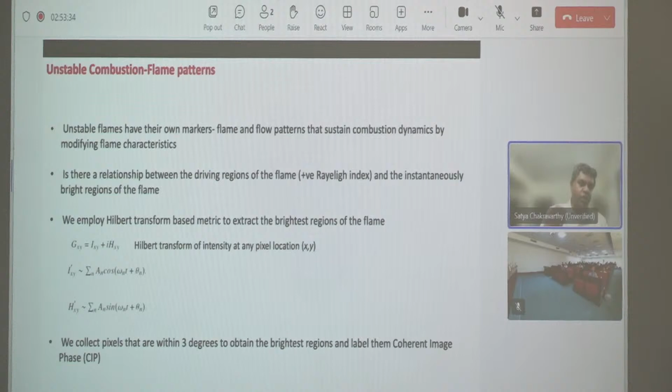So it's essentially looking at the phase difference of fluctuations of every particular pixel. The images that we see are like this to begin with.

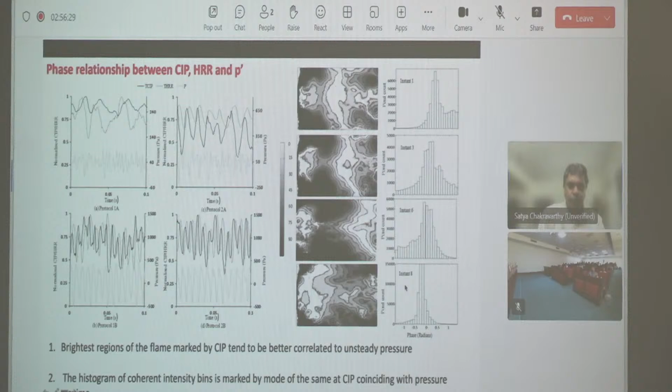As we can see, as the central toroidal recirculation zone evolves, the coherent image phase is going further down, and then a new coherent image phase region is evolving as you go to instant 8 when compared to instant 1, and so on.

So what is actually causing that pressure blip? That's again a very interesting thing we looked at. We are motivated to investigate why the blip is happening, and broadening particularly at its maxima, which causes the asymmetry between the compression and the rarefaction phases. Such an asymmetry can be the result of more than one process.

So we now have nonlinear power generation, the highest at the duct acoustic mode, then it's predominantly linear. Then we have significant nonlinearity, so the question is, is it significant enough to cause a pressure blip? So we could perform the same for the flame-derived measures by considering two regions instead of just looking at the pressure alone. The QNLP of the flame emission space-time series is performed, and we get these results for the THRR, UHRR, and DHRR. We split them into 3 parts, look at these phase differences, and draw a conclusion.

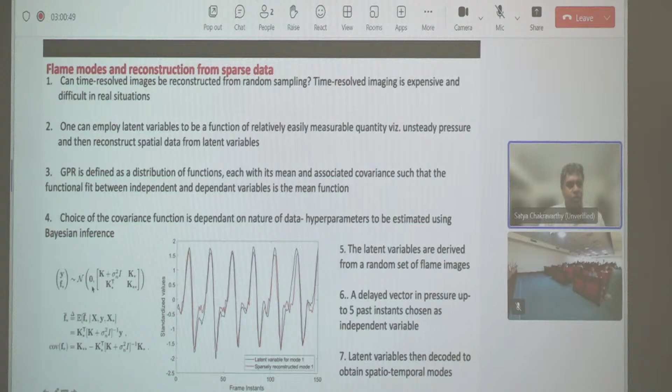I think this is probably one of the last slides, coming close to the conclusion. Or maybe we should just skip this and get directly to the data here.

If you look at the temporal evolution of these different flame modes, mode 2 near the flame holder versus mode 1 that gets convected further out with the pressure data, they play out like this. We have to look at which one is skewed over the other and causing that pressure blip, and that's what this particular figure presents.

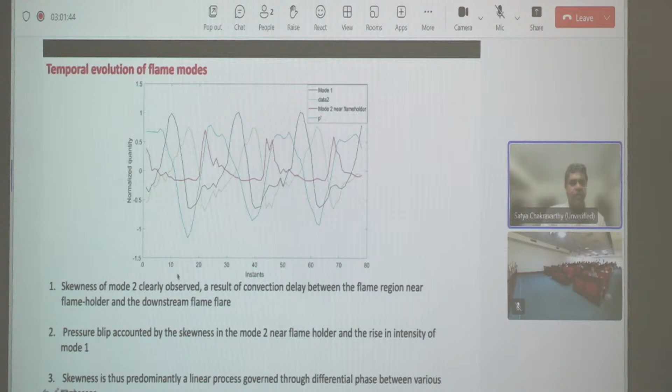So in summary, combustion dynamics is actually a development of ordered phenomenon from a disorderly turbulent state, which can be studied in experiments using time and frequency domain methods. What we have done is develop a particular sensor that can be put even in practical engines, to study the time-dependent chemiluminescence data.

The stable state is characterized by the presence of high amplitudes which are stray in nature, with transition to instability marked by increasing phase synchronization. The parameter variation effected in a probabilistic manner for two sets of oscillators, each for flame and pressure, is seen to qualitatively match dynamical states observed in experiments.

The stray anomalies can be picked by forming a probability distribution and using the VAE to obtain a better match with unsteady pressure compared with intensity fluctuations. And unstable combustion is characterized by flame branching, curling, merging, and convection.

Instantaneous bright regions of the flame are seen to be better drivers of combustion instability, as we have seen from the CIP, the coherent image phase measurements. The pressure blip seen during unstable combustion at the maxima is influenced by nonlinearity, but other linear processes also contribute.

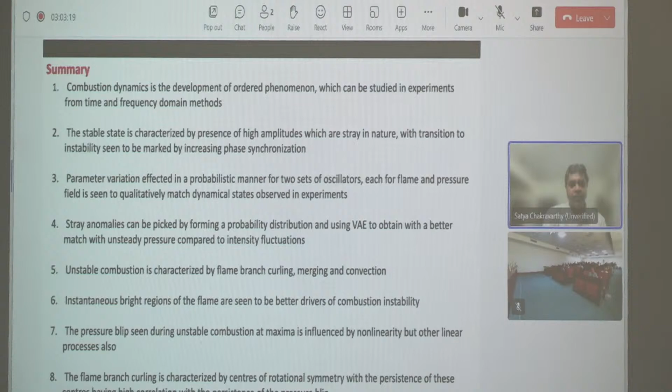The flame branch curling is characterized by centers of rotational symmetry, with the persistence of these centers having high correlation with the persistence of the pressure blip. Thank you very much.